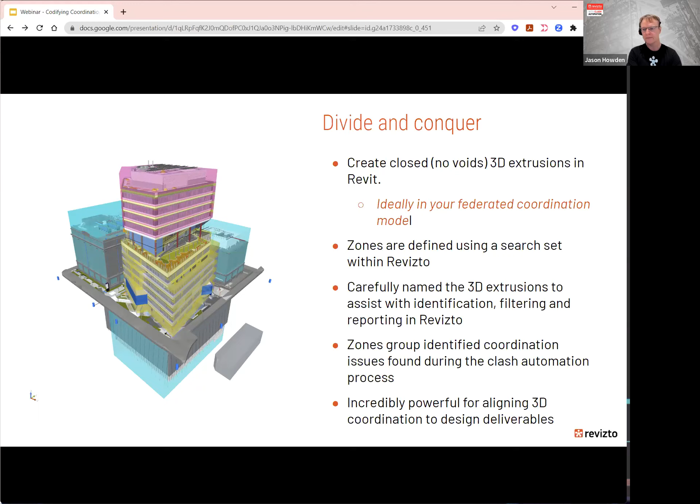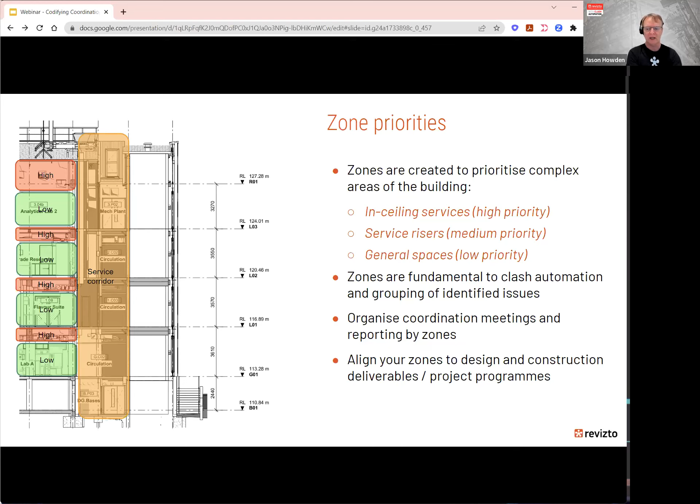This is another good example of showing how you can split those zones down. Zones can also be used to determine whether an issue or a clash is identified as a low priority item or a high priority item. Again, it's very useful to group and utilize zones within the clash automation process in Revizto. It's kind of the fundamental backbone to how you would set up the whole coordination process.

Building on top of zones and going a level further and a bit deeper into this rabbit hole of coordination is search sets. I've fallen in love with search sets years ago, way back when I first started using Navisworks. Navisworks introduced me to search sets. Revizto took that concept and leveled it up. The ability to create cascading search sets in Revizto still blows my mind. They really are the brains behind the coordination and how you can access information inside Revizto.

What do I mean by a cascading search set? Well, it's being able to grab the big stuff and then quickly and easily filter it to the small stuff - maybe a door handle on a door inside a building, as an example.

And to be able to repurpose that information quickly across multiple projects, or to edit a high-level search set - maybe the model file - and have all of that ripple through the categories, the properties, and the coordination search sets. A good structure for search sets is: grab your models, grab your categories from Revit. You can substitute categories for IFC properties if you're working in an IFC environment, and then grab those elemental properties of the individual objects, layering those into creating the coordination sets. I'm going to talk more about this as we go forward.

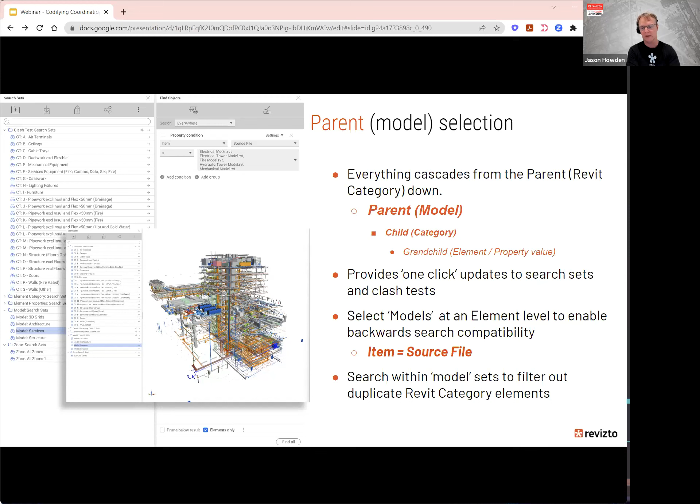Categories are fundamental to Revit as a building information database, and categories form that fundamental basis. It makes it a really easy go-to for building out any kind of search set strategy.

These categories are common across the English versions of Revit. I do know that some of these category names change between versions, and some change based on the language version of Revit. So you may need to check some of that if you're working on multinational projects or projects where there might be different Revit versions at play. And when I mean versions, I don't mean file versions—I mean German version versus English version, etc. You might need to adapt your search set strategy to allow for that bilingual approach.

Another way of adapting to that could be using more of an open BIM approach, using some IFC definers and descriptors in that space to link all of those things up, where the language component becomes a bit more agnostic.

Here's an example of selecting pipework using the built-in Revit category, selecting pipe accessories, pipe fittings, and pipes—and I'm saying that's my pipework. Then I can isolate that and check it in the 3D window with a right click, and know that I've got all of the pipework and I've not got any artifacts like mechanical plant or structural steel beams. So I know what I'm grabbing.

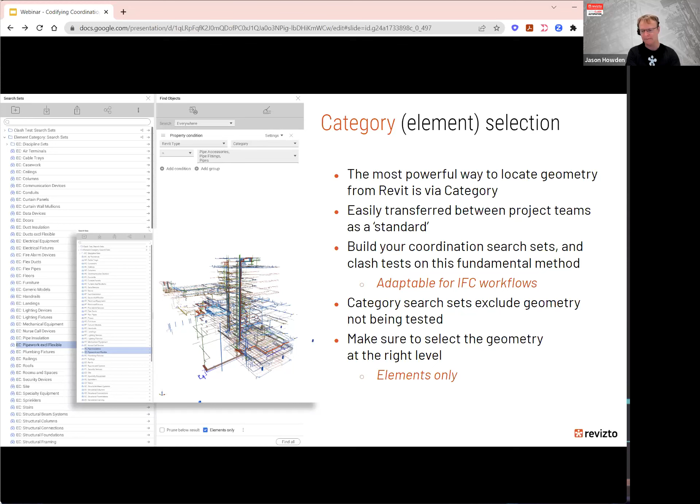Then I can break that down a further step by diving into the properties within the categories themselves. Here's an example of diving into the pipework to find the fire protection pipework.

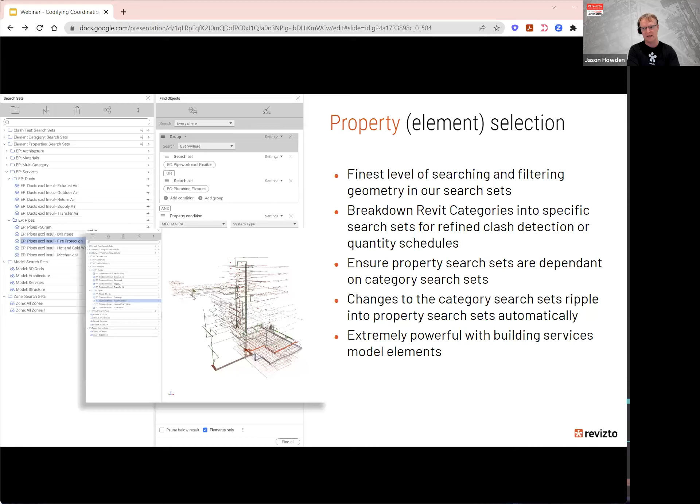This is where the cascading search sets really come into their own. You can see in this example that it's cascading the pipework search set and the plumbing fixtures search set, and then it's looking for a condition for fire services based on those other search sets. So if I make any changes to my pipework or plumbing fixtures search sets, they will automatically cascade into this search set, and then this search set links back into my coordination search sets that I use for clash detection.

Here's an example of a coordination or clash test search set—another pipework example. You can see that the pipework is coming in as a cascading search set. It's a drainage one, and it's also finding pipework that's less than 50 millimeters in diameter.

Building up search sets and clash tests on this strategy really gives you the ability to, with very few search sets, create hundreds of combinations of clash tests, and it gives you the ability to control those clash tests with confidence, so you don't have to spend a lot of time on quality control and quality assurance. When running your coordination tests, you can do that with confidence and know that you're excluding any kind of false positives along the way.

One of the tips I like to do with these search sets that lead into the clash tests is to also exclude anything that you're not actually going to test.

Things like insulation or any kind of model elements that you're not actually going to test, or if you're going to just mark them as a false positive, think about excluding them from the search set themselves. A big reason for that is it'll speed up the entire process, and it will make the clash detection process much more seamless.

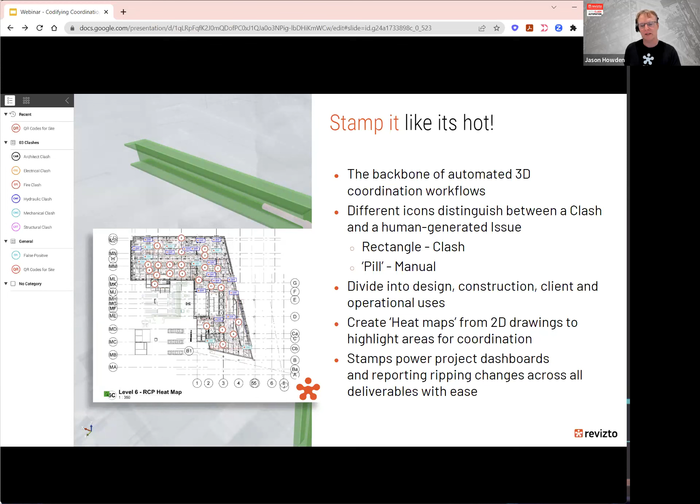Stamps also have some special features in that they act as templates as well. I like the stamp templates because they give you one point of reference that you can use for either a design discipline, a construction discipline, or you might want to break it down into individual things that relate to zones or other components. Stamps could be used for QR codes, for example, and you can print them off, stick them on site and scan them with the Revizto phone app to hyperlink you back into the digital environment when you're on a construction site, useful for defecting or checking where the issues might be, or recalling some asset information from a piece of plant and machinery.

Using the stamp templates, we can quickly control the color, the issue priority, who it gets assigned to, any deadlines, watchers, and whether it's a public issue or not. It can also include tags, whether an issue might be a false positive, or maybe it requires further design review. Something like running a clash test to discover where penetrations might need to go in concrete floors, then tag it with a stamp, and put a tag inside the stamp that says penetrations.

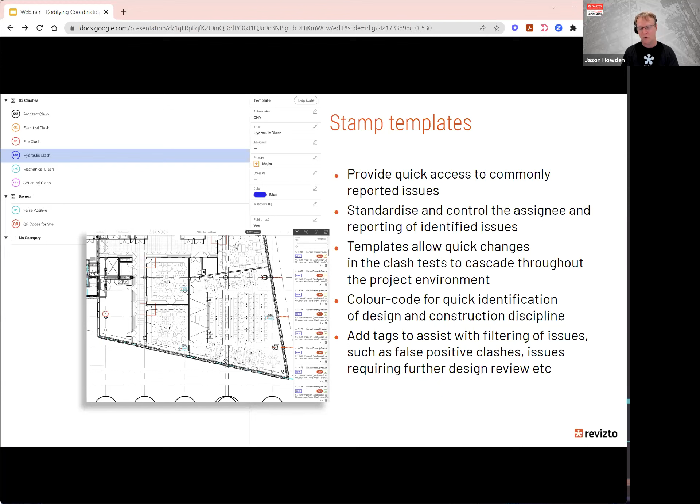And then you can run that as a report and have a conversation with a contractor around where they might undertake some core drilling, or whether they might do cast-in penetrations as part of the construction process. It's very useful, especially since they show in both 2D and 3D. You can produce a floor plan where these things appear automatically with our clash detection engine.

Heat maps. I've found heat maps to be very useful. Heat maps can just run directly off top of floor plans. You can run them also over reflected ceiling plans. The beauty about turning on the pins and seeing the stamps in a heat map format is you can see where the congestion is for coordination in the context of a building footprint.

Sometimes when you're looking at a big long list of issues, you just don't have any context where these things are. Yes, you can filter it based on zones and levels and grid locations and who these issues might be related to or who reported them. But that requires a level of skill and dedication to learn deeper parts of the platform. Sometimes it's easier to just look at a 2D floor plan and go, wow, there's 10 issues in that plant room. Maybe we'll have a coordination session on the plant room next week and we'll talk about these 10 issues.

That ability to blend the 2D and 3D worlds in Revizto, I think, is one of our greatest unique selling points for the platform that just really enables everyone in the project to have insight about how the project is going and also interact with the project at their skill level, their way.

You can customize the heat maps, and something I like to do with the heat maps is set them up in that federated model, and that way you can kind of set the view templates and the look and feel of the floor plans or the backgrounds to these heat maps to suit your own personal needs. And then as the models are uploaded on that regular basis, the heat maps will update automatically.

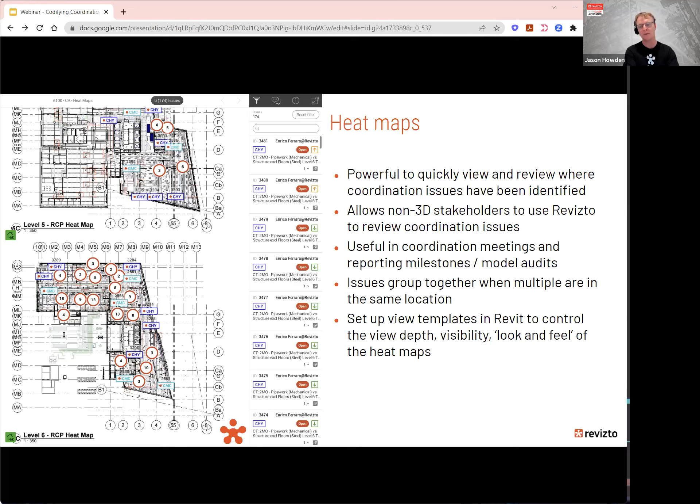So supercharging your coordination with some clash automation, where we look at the finer points of how the clash tests are made, and then I should still have time for Q&A. So clash tests, the clash tests are really quite simple to make with this strategy. You're really just selecting your clash test search sets, and you're selecting which ones you want to clash against each other. It's important to think about and record the clash tests. Using a matrix is really useful, so you can easily find where clash tests are potentially doubling up.

You don't want to clash test object A with object B, only to later in your clash test framework be clash testing the same object B with object A in reverse. So yeah, capturing it in a matrix format will show you where any duplication might be present, and you can cancel those out. That way you're refining your process and you're minimizing the amount of manual time reviewing the individual clashes that can be generated in these 3D models when using a clash detection engine.

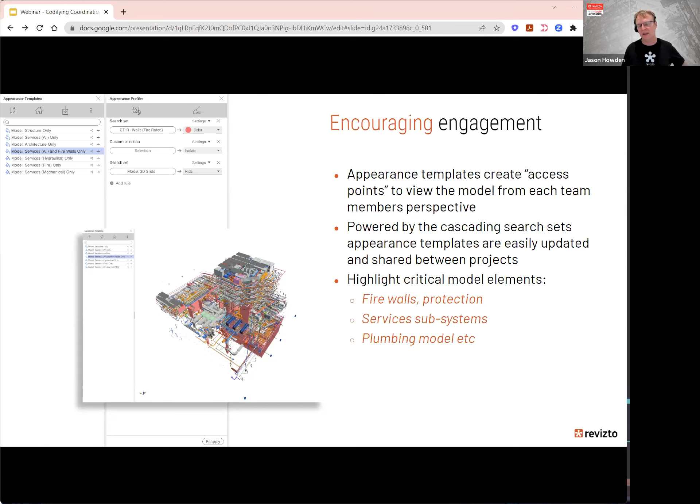And you can see in the example here that the model grids and the clash test for fire rated walls are used. So again, those cascading search sets feed right through the entire platform, all the way through to appearance templates, etc. Very powerful and useful to allow people, even on their mobile phone, to get to a view and apply an appearance template very quickly.

And then the last point that I want to touch on is once you've built all of that, how do you then quickly communicate that? Using our dashboard technology and our reporting technology, you're able to generate dashboards that simplify a very complex situation. So you can look at a line diagram and see a bit of a history of what's been happening with the coordination. Maybe you want to see at a macro level all of the solved issues versus all of the open issues. So you can have a very positive conversation with your design or construction team.

And more importantly, these things can be scheduled and automated so you can get a Monday morning update. And the beauty about that is nobody's been involved in that update over the weekend. The machines have done all the hard work, and they're going to email you Monday morning with an update, and then you can make some informed decisions on that.

So really, what does all of that mean? Well, a lot of business efficiency and savings potential with automating your traditional 3D coordination workflows with Revizto. And ultimately, that maybe means that Revizto is part of your project team going forwards, and it's there to augment and supercharge your projects. If you're struggling to find the human resources to meet your needs, maybe you can automate your workflows and augment your team with a digital team member.